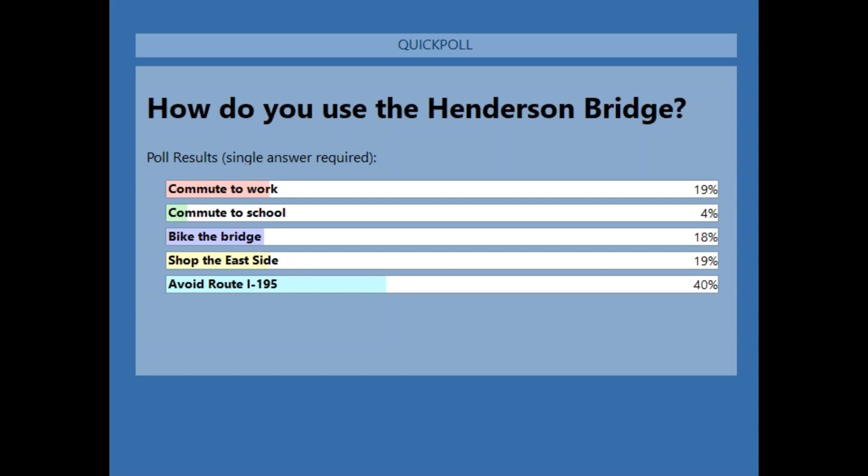And here are the poll results. In the lead by far, avoid Route I-195. Tied for second, actually three very close: shop the east side, which is good to see for the doctors, restaurants, and businesses on the east side; bike the bridge; and commute to work. Commute to school came in at 4%. Thank you for sharing in the poll.

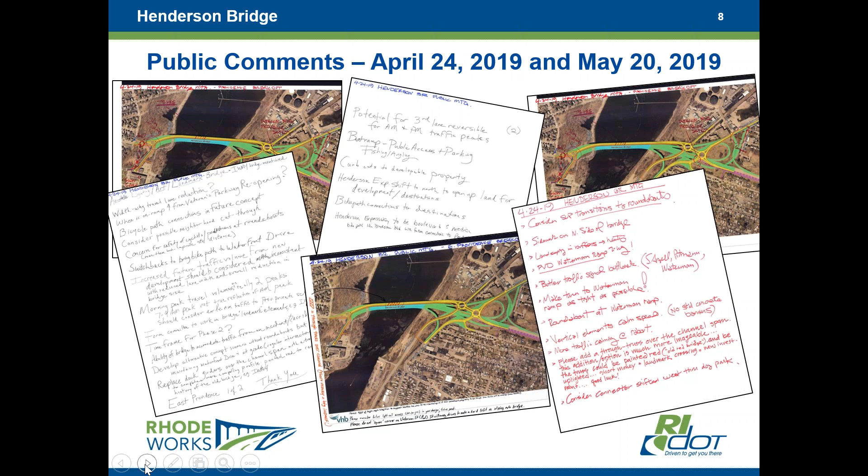They include a substantial protected bike path. Many residents were concerned for safety, as they were excited about the idea of a new bike path on the bridge. We heard about bridge overlooks and decorative lighting, great ideas to add to the look and feel of the bridge. We moved from the double roundabout option we showed in East Providence, after hearing from stakeholders and working with the city, to a new single roundabout in East Providence, which you'll see during this presentation.

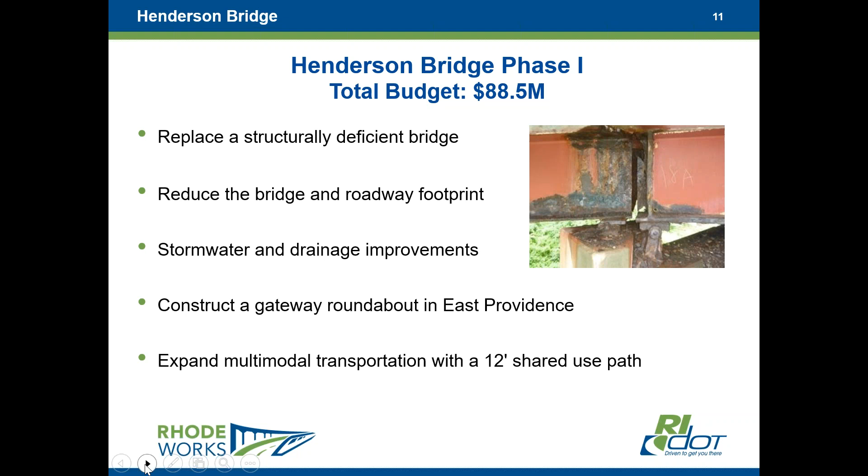During our public involvement, we heard it feels like a highway, speeds are excessive, and there's a safety issue on Waterman Street with the connection to the Henderson Bridge. That conflict is because Waterman Street sweeps onto the approach, and bicyclists are allowed to take that left as well. However, when vehicles continue through on Waterman Street towards Richmond Square, there's a potential conflict between the bicyclist turning left and the vehicle continuing straight. These are some of the issues we will address in our proposed improvements as we get further into this discussion tonight.

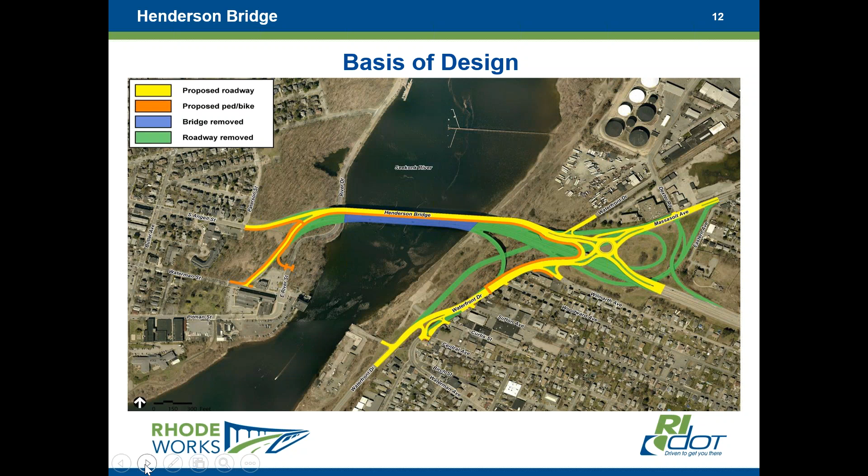So on the next slide, I'd like to continue with the proposed improvements for the Henderson Bridge. You'll note that the Henderson Bridge will be reduced in length and width. We provide 3 lanes, 2 lanes heading to Providence, 1 lane heading to East Providence, and incorporate a shared use path. We will post the bridge for 30 miles per hour.

We will also maintain that channel clearance, as I had mentioned, because it is a nice asset for potential waterfront development north of the bridge. We will, however, lower the East Providence approach, which allows us to reduce the length of the bridge and create an at-grade roadway through East Providence.

So in East Providence, by creating this at-grade roadway, our intention is to change the name of the Henderson Expressway and call it the Henderson Parkway. Again, the roadway would be posted for 30 miles per hour.

To facilitate the connections between these roadways in East Providence and the Henderson Bridge, we'll introduce a roundabout, an at-grade intersection. I would like to clarify that a roundabout is not a rotary. A roundabout is much smaller than a rotary. It operates at much lower speeds, and traffic entering the roundabout is under a yield condition, so vehicles within the roundabout have the right of way.

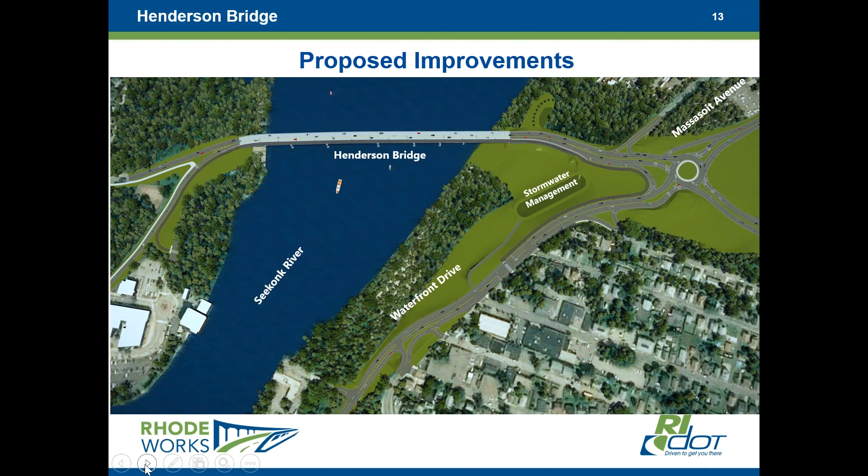Now I'd like to get into a little bit of the weeds of our design, starting with the traffic demands. Back in March of 2019, we performed traffic counts and reviewed historic data. We determined that approximately 21,000 vehicles use the bridge per day.

We've developed a VISSIM simulation, a simple term is a traffic model, and we calibrated that traffic model by witnessing existing conditions and understanding the backups that happen during the day. We use that model to support our design.

We've also worked with the municipal planning departments and accounted for future demands from anticipated projects, as well as the proposed improvements of the Washington Bridge project, since Gano Street will remain open, and the potential for a new off-ramp to Waterfront Drive from I-195. We took these traffic projections and forecasted them out 20 years.

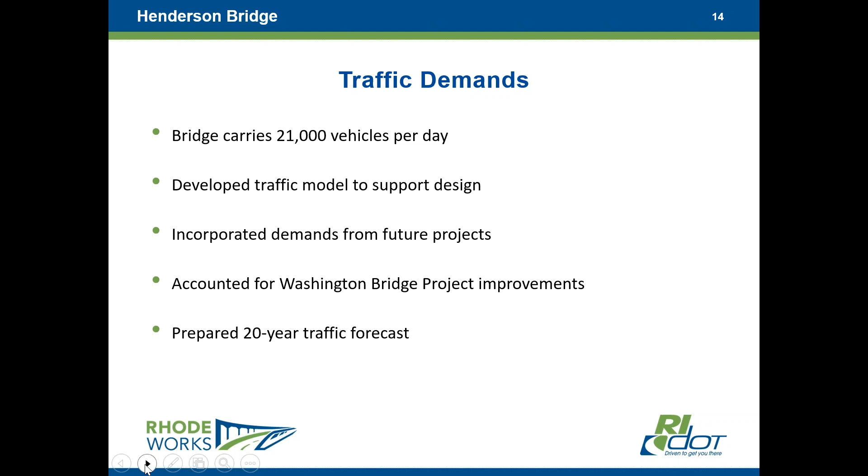On the next slide, we jump into that traffic evaluation to show you the reasoning behind the lane geometry we used on the Henderson Bridge.

We jump into peak hour, as Dave had mentioned. Peak hour is the most vehicles used in a certain hour. As we found, the morning peak happens towards Providence, during commuter hours between 7 and 9 a.m.

Under existing conditions, in that peak hour we have 1,245 cars per hour. In the 20-year forecast, we have 1,495 cars per hour. In reverse, the evening peak headed towards East Providence happens during commuting hours of 4 to 6. Under existing conditions, you had 1,085 cars per hour, and a 20-year forecast of 1,185 cars.

We have guidance that we use in developing our design. That guidance shows a local roadway network can handle approximately 1,200 cars per hour per lane. You'll see in the Providence direction we are just over that threshold in existing conditions with 1,245, and in the proposed condition, 1,495 exceeds that.

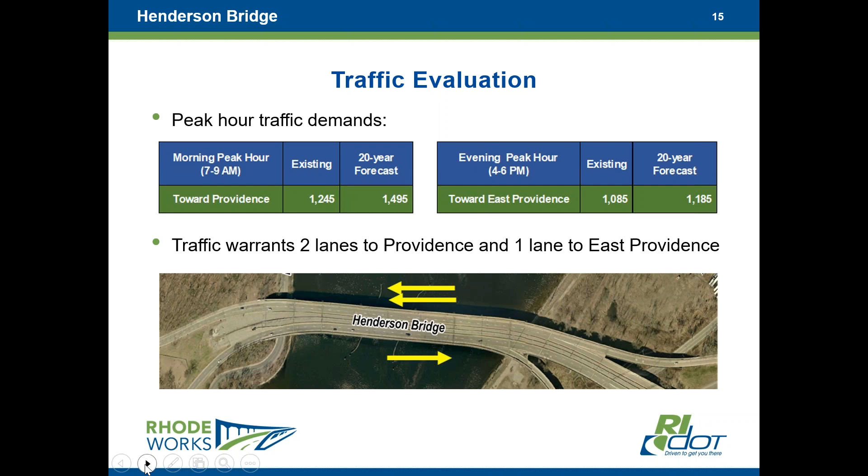Now that we've jumped into the weeds, I want to jump back out and give you the nice graphics that show an animation of our proposed improvements. Kathleen, if you could go to the next slide.

If you could start the animation, we are going to start on the new Waterfront Drive in East Providence, heading north towards the roundabout. I apologize for the choppiness.

As we're heading north, we just passed Waterman Ave coming into the new Waterfront Drive. You're looking at a mid-block crossing of the shared use path. We're coming up the new Waterfront Drive to the proposed roundabout. You will note the pavement markings show the yield condition that I mentioned.

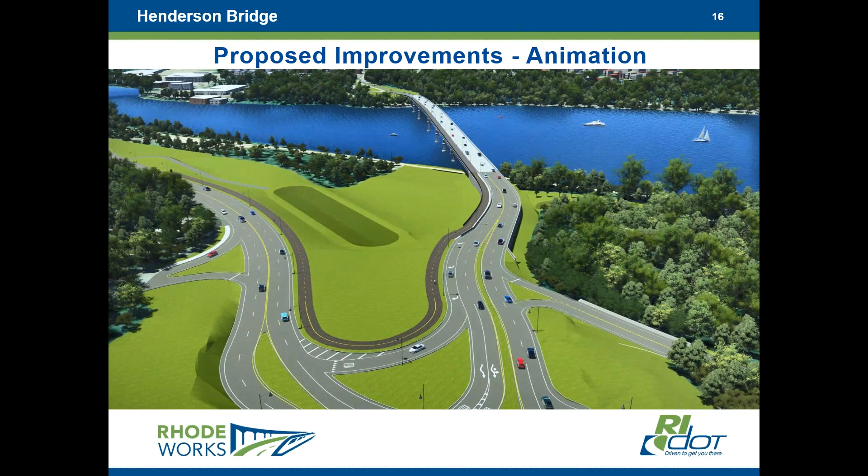We are now starting to head along the new Henderson Parkway. On the right-hand side of the screen, you see the Waterfront Drive with its right in, right out, again providing access to the potential developments north of the Henderson Bridge.

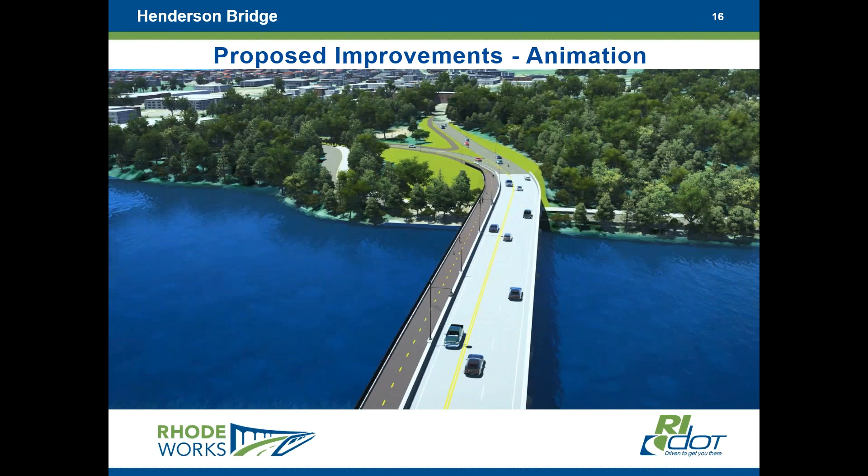As we fly over the Seekonk River heading towards Providence, you'll see 2 lanes heading towards Providence, 1 lane heading towards East Providence. A traffic calming measure you'll see not so much in the animation, but in proposed conditions, is a speed feedback sign on the East Providence side as you get off the bridge, presenting the speed of the vehicle coming across, and also a sign showing that the speed limit is 25 miles per hour.

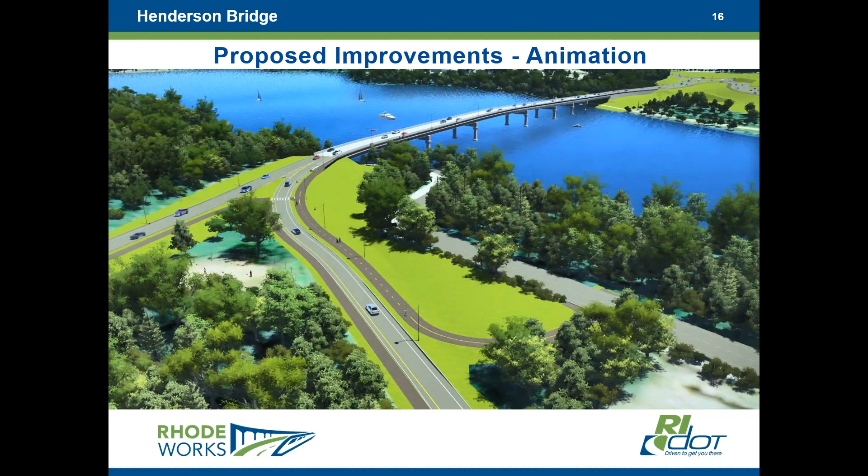One of the improvements we proposed on the Providence side is a sidewalk that connects South Angel Street to Waterman Street. It runs along the dog park.

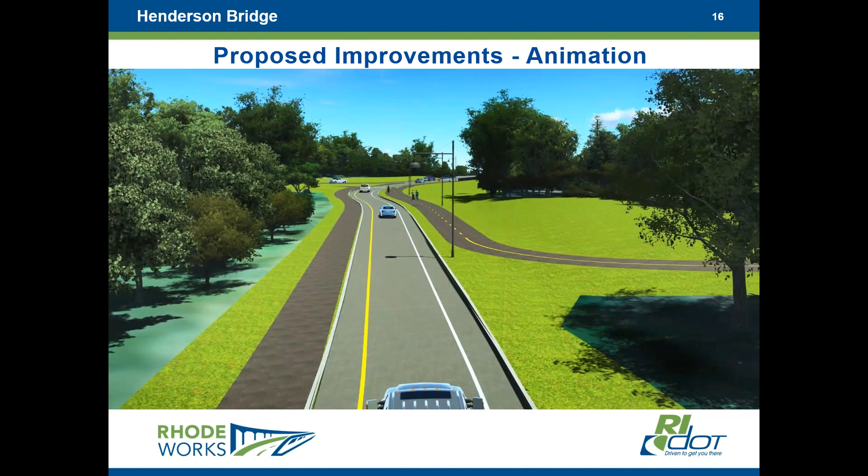Now we're turned around, heading towards East Providence, on the approach from Waterman Street towards the bridge. The proposed sidewalk I mentioned is on the left, the approach in front of you, and the shared use path on the right.

We continue up. Here's a pedestrian crossing from the proposed sidewalk to the shared use path, so the neighborhood on South Angel Street can be connected to not only the dog park, but the shared use path.

As we continue up over the bridge, you see two lanes heading towards Providence, one lane towards East Providence, and a 12-foot wide shared use path. We do incorporate decorative lighting, the taller ones over the roadway, the lower ones over the shared use path.

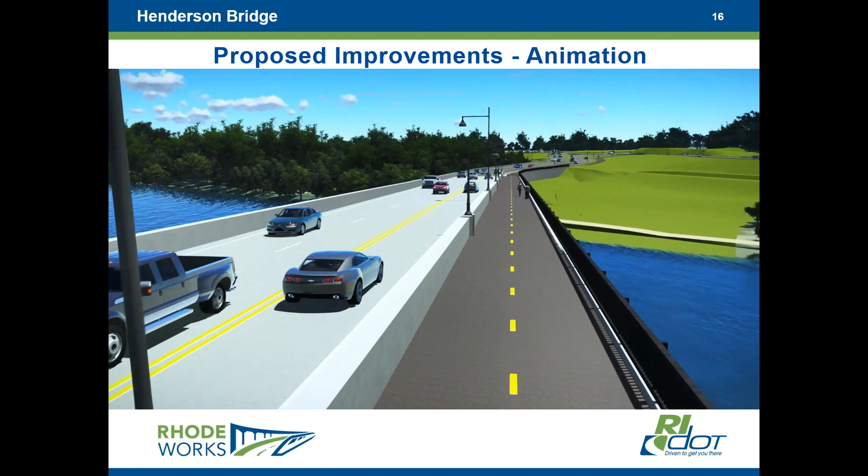As we continue on the bridge, it has been lowered, as I mentioned, and we come into an at-grade roadway, our new Henderson Parkway. I apologize for the glitch in the animation.

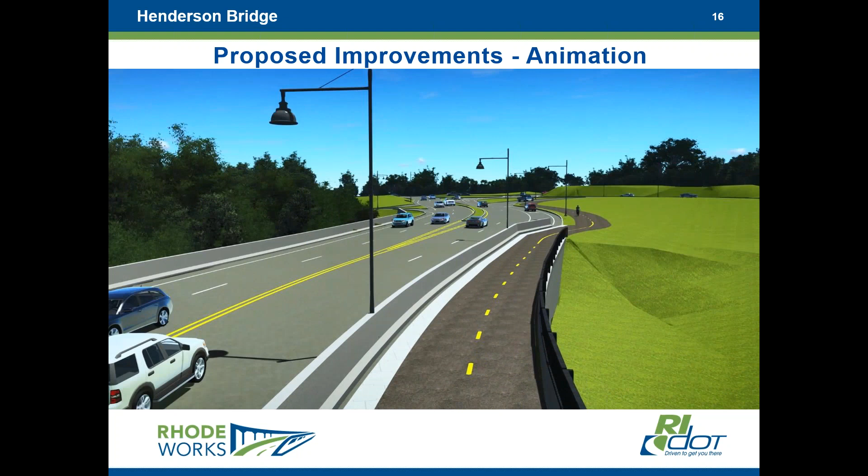As we continue into East Providence on the new Henderson Parkway, we open up into two lanes as we approach the roundabout, just a way to manage traffic in and around East Providence. We also provide a slip lane to the right, which will peel traffic out of the roundabout and allow them to head south on the new Waterfront Drive.

On the left-hand side of the screen there's also another slip lane, coming from Massasoit Avenue, again peeling some of the traffic from the roundabout and allowing them to head towards Providence and the Henderson Bridge.

This animation will be included on the Henderson Bridge project page and will also be posted on YouTube for your future consideration. As we finish up the animation, I'm going to jump into some still images of this animation.

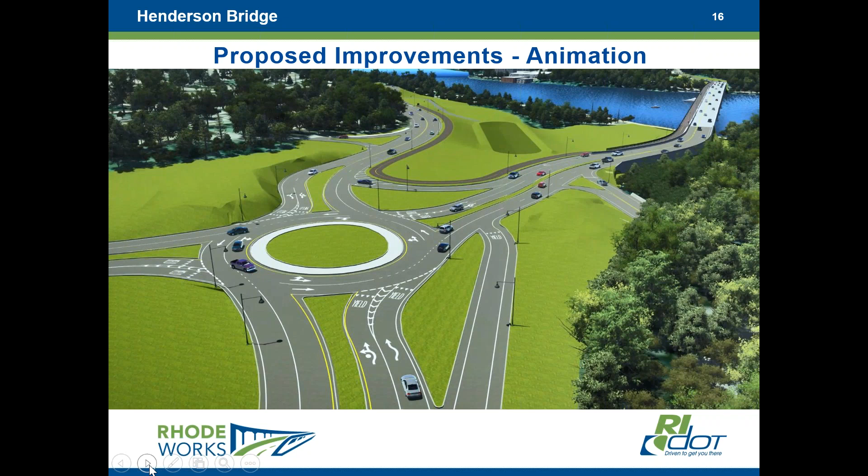Here's a still image on the Providence approach from Waterman Street, highlighting the dog park off to the left-hand side, the proposed sidewalk connecting South Angel Street to Waterman Street, the one-lane approach from Waterman Street to the Henderson Bridge, and a grass buffer between the roadway and the shared use path.

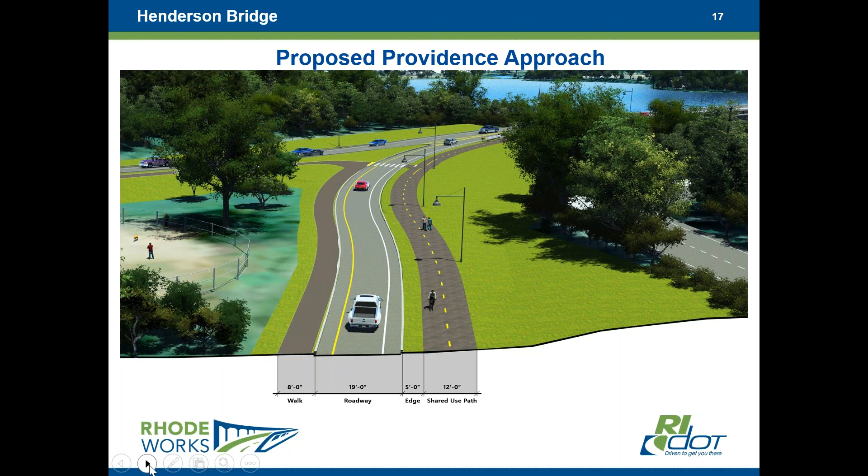On the next slide, just a view of the proposed bridge, again showing two lanes heading towards Providence, one lane towards East Providence, and a 12-foot wide shared use path. The lanes are 11 feet wide, a reduction from the 12 feet you see out there today.

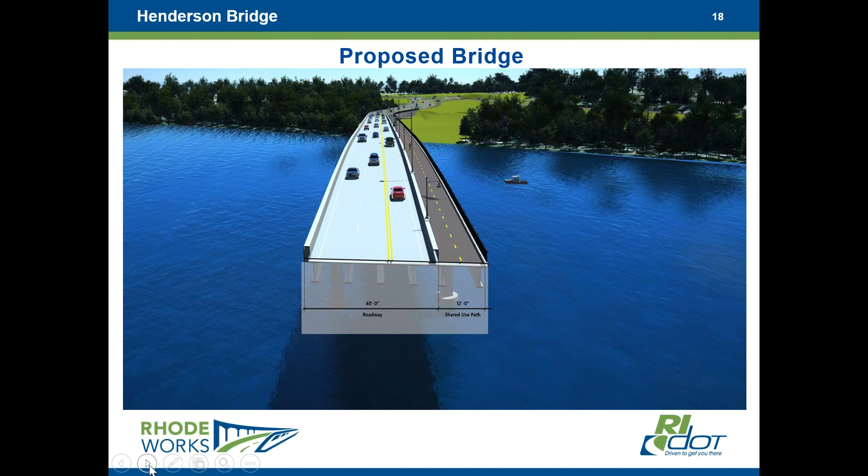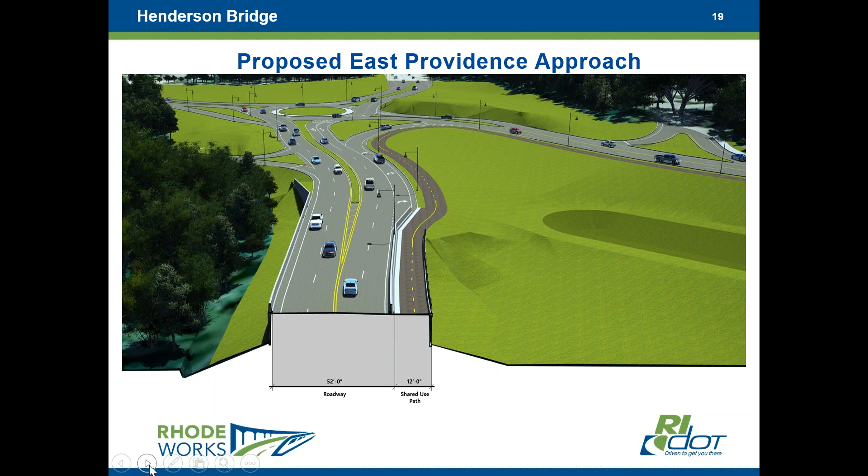Our next slide shows a view of the new Henderson Parkway, again a roadway with 11-foot travel lanes and a 12-foot wide shared use path. This also gives you a view of that slip lane I mentioned on the approach to the roundabout. Our last still image will be of the new Waterfront Drive.

Looking north, you see in the middle right Waterman Ave coming into Waterfront Drive and continuing up towards the roundabout. You see the mid-block crossing where the shared use path comes across the bridge, as Anthony had mentioned.

At the mid-block crossing, there'll be a special traffic signal introduced such that bicyclists and pedestrians will be able to push the button. Traffic will be stopped on Waterfront Drive, and bikes and pedestrians will be able to cross the road, making that connection from the neighborhood east of Massasoit Avenue today to the waterfront.

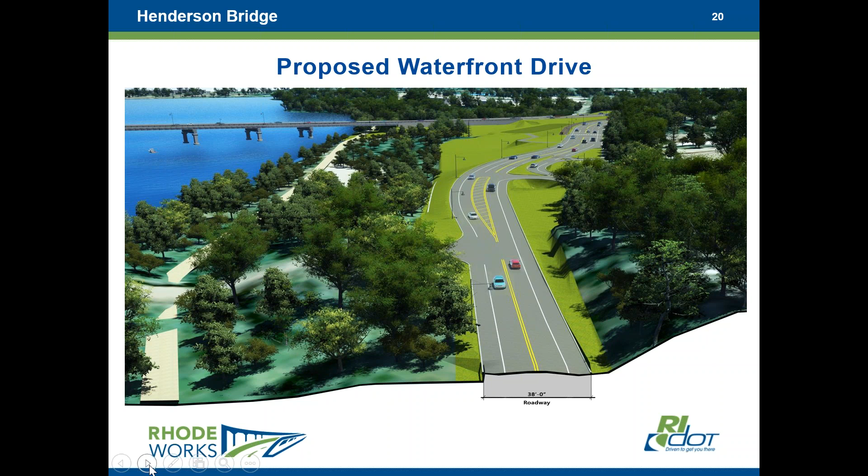On the next slide, I'd like to jump into the construction timeline we anticipate for this project. I'd like everyone to note that the construction phasing we've developed is meant to build it safely and efficiently. We've minimized the number of traffic phases and shifts throughout the project.

More importantly, the Henderson Bridge remains open during construction. We maintain vehicle and bicycle access. We've also coordinated with RIPTA, as I mentioned before, and will ensure service is maintained throughout the construction of the project.

The benefit of DOT today is that Anthony Pompey is the project manager for the Henderson Bridge and the Washington Bridge project, so the construction phasing will be coordinated throughout construction as we move these projects forward.

The timeline presented shows construction is anticipated to begin late summer, early fall of 2020. We will begin shifting traffic within the project limits to the southerly bridge in the winter of 2020. As we merge Waterfront Drive with Massasoit and create the at-grade roadway of the Henderson Parkway, we will need to close Waterfront Drive between Waterman Ave and Dexter Road. We will implement detours in East Providence to facilitate traffic, and we will also shift traffic to the new bridge in the spring of 2022. We will need to clean up and demolish the existing bridge and other elements, so the project will be complete by summer of 2024.

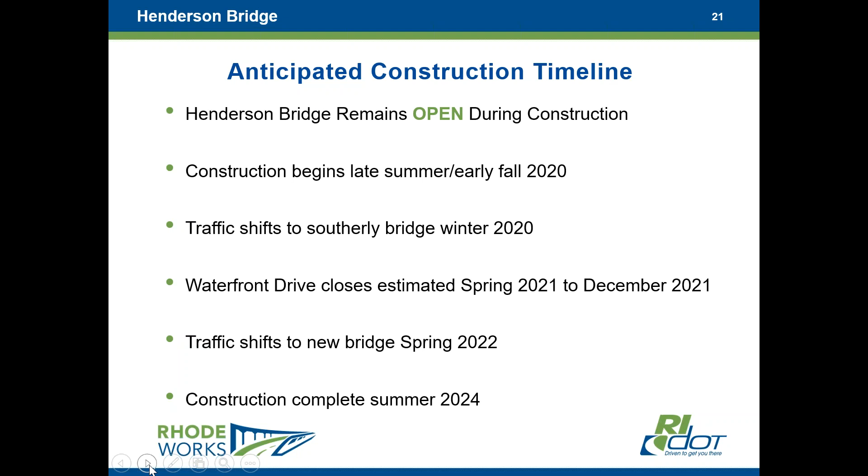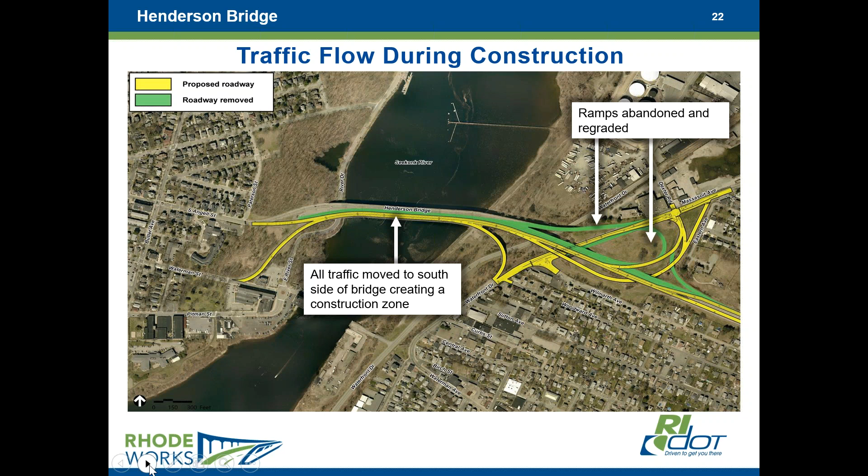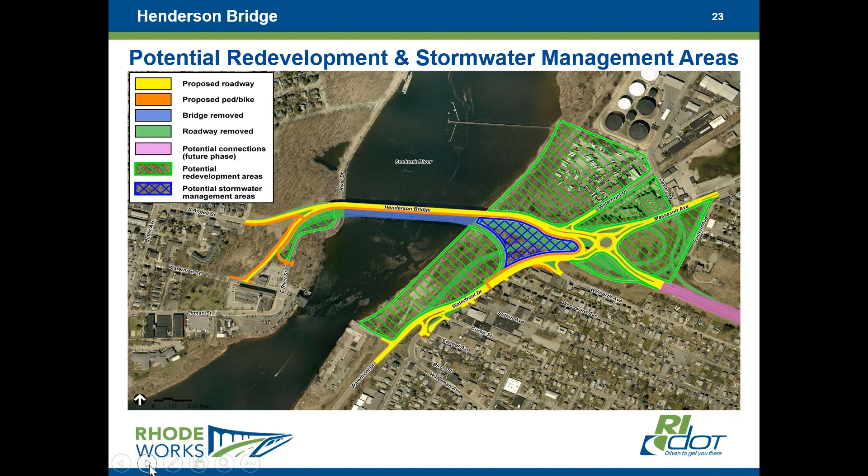Anthony? Great, thank you, Jamie.

All of the designs and details Jamie just reviewed have been fully designed and will be constructed as part of the construction project scheduled to start later this year. I would now like to share some initial concepts about the future phase 2 contract that we're currently anticipating to advertise for construction after the completion of phase 1. Our main goals for phase 2 would be the extension of the shared use path further into the cities of Providence and East Providence, additional traffic calming and safety improvements on both sides of the river, creating a bridge overlook and other public spaces that could be used by all users, and enhanced landscape and urban environment elements.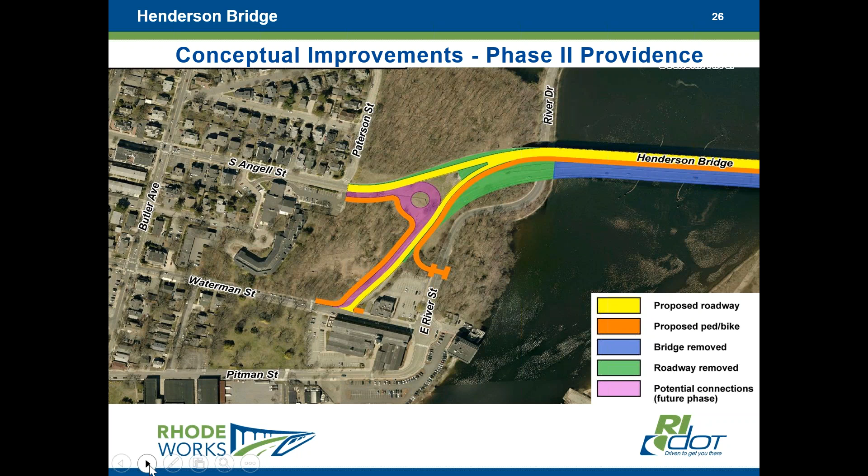Here we have the other side of the river, which shows a northerly extension of the shared use path up Massasoit Avenue. This phase would also include redevelopment of the remaining portion of the Henderson Expressway all the way to North Broadway, with reconstruction of the intersection at that end as well. A current concept would propose another roundabout in place of the existing bridge that carries North Broadway over the on-ramp to the Henderson Expressway.

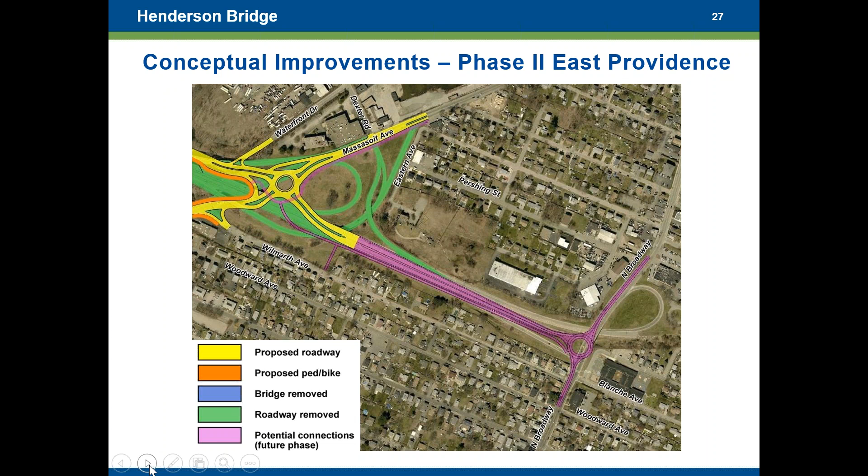Now we show some conceptual renderings to serve as inspiration and a starting point for some potential phase 2 improvements. Here's a conceptual image of a potential bridge overlook area. We were able to incorporate some design details into our phase 1 project that would allow this or something similar to be constructed with very minimal impact to the new structure.

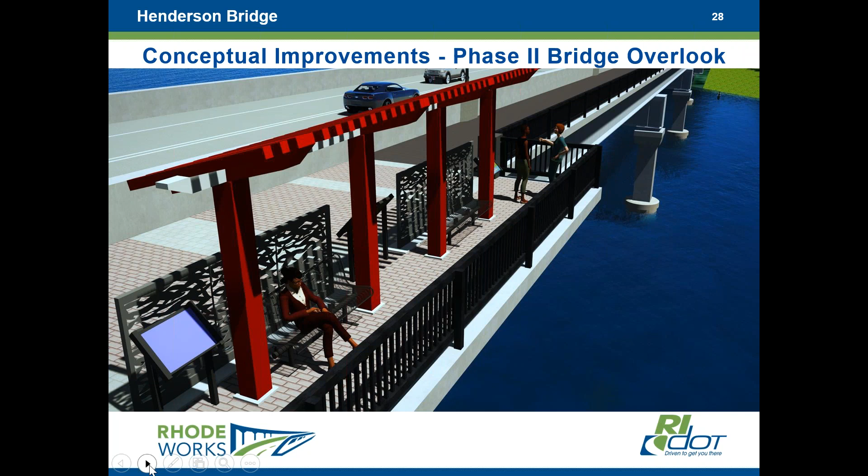On our next slide, we'll have a look at some potential landscaping and urban development opportunities as envisioned by one of our landscape architects. Improvements such as these could be incorporated throughout the corridor, providing a cohesive design for the area as a whole.

We'd appreciate any feedback you may wish to offer on any of these concepts, and would encourage you to reach out to municipality planning offices to discuss any specific ideas you may have before our design activities begin within the next year or two. When we do begin our design for this phase, we'll be working directly with each city to incorporate as many design features as possible. As we continue our STIP revisions this summer, we hope to be able to provide some defined budget and schedule information as well.

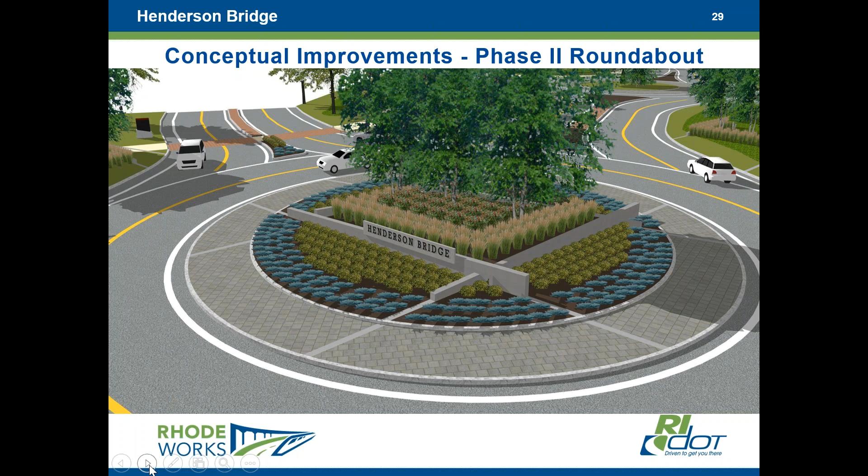And with that, I'll turn it back over to Dave for our second poll question.

Thank you, Anthony. Our second poll question is focused on phase 2, which will be our initiative starting next year. What component of phase 2 is of most interest to you? Please select one: roundabout installation and roadway realignments, extension of bicycle and pedestrian access to the shared use paths, creation of green space and landscaping features, or the decorative bridge features, similar to the overlook and uplighting that we have heard from our public involvement meetings.

Again, please take some time and select one. This will go into our review prior to design as we get past concept, working with the planning departments of both cities for our phase 2 project. I'll give everyone a few more seconds to choose an answer.

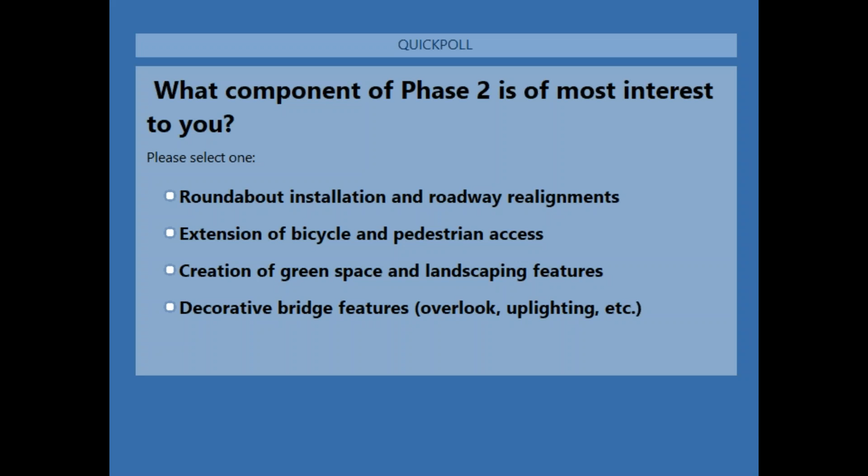Okay, let's see the results. What component of phase 2 is of most interest to you? Number 1, extension of bicycle and pedestrian access, followed closely by roundabout installation and roadway realignments, along with creation of green space and landscaping features. The decorative bridge features finish at 10%. Again, thank you for participating in both polls.

So now we'd like to have Anthony come back on to give you a preview of the upcoming Washington Bridge project, which again is so related to the Henderson Bridge project in many ways.

Thanks, Dave. Due to the proximity of these two major projects, we thought this would be an ideal time for a first introduction to our upcoming Washington Bridge project. You can see several key components of our proposed project listed here that I'll get into more detail on the next slide. We've designed this new project with a primary focus on maintaining existing traffic levels to the maximum extent possible throughout the construction duration, while also providing dramatic improvements under final conditions to the delays currently experienced during rush hour periods. This is a design-build project that is also currently advertised, with construction anticipated to begin in 2021.

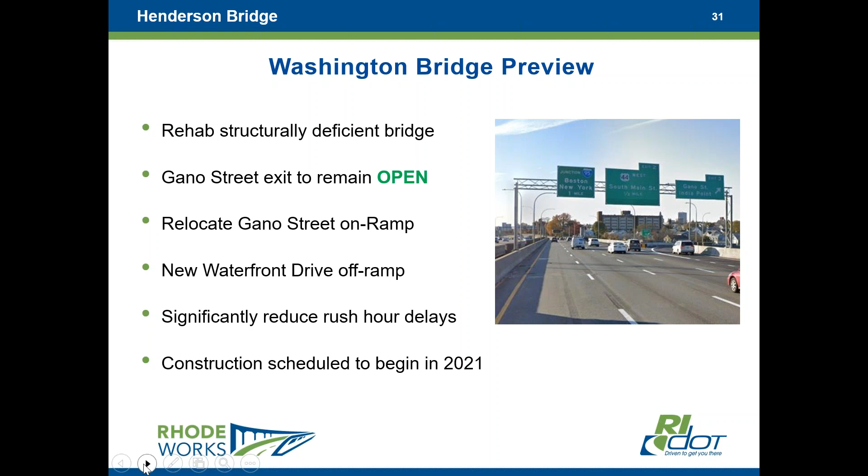This image is an overview of our proposed conceptual improvements. Project limits shown in yellow are from the Broadway underpass in East Providence to the South Main Street off-ramp in Providence. The orange segments shown represent some new proposed infrastructure components. Some key improvements include the elimination of an existing lane drop near the Broadway underpass, on the right side of the screen. By restriping this corridor, we can maintain 4 travel lanes throughout the East Providence section of the interstate, removing a significant existing bottleneck.

This newly extended 4th lane will then become an exit lane to a new exit to Waterfront Drive, providing direct access to the entire East Providence waterfront and the Henderson Bridge area. The remaining 3 lanes on the interstate will then join the 2 on-ramps from Taunton Avenue and the Veterans Parkway as they do today. However, by slightly widening the westerly 4 spans of the existing bridge between the Gano Street exit and Gano Street, on the order of only about 10 feet, will allow us to convert the existing right lane.

This will convert the existing right lane from an exit lane to Gano Street into an option lane that also allows vehicles to continue on 195. By eliminating a major weaving movement, this modification will drastically reduce existing delays on the interstate during commuting hours, while also keeping the Gano Street exit open to traffic.

As part of these modifications, we'll also need to relocate the existing Gano Street on-ramp to the other side of Gano Street. It will run directly alongside the existing exit ramp at the same elevation, with access at the same signalized intersection at Gano Street, which will be modified to allow a left turn for southbound traffic. This change will provide the necessary sight distances for vehicles entering the highway and provide a safe merge into highway traffic.

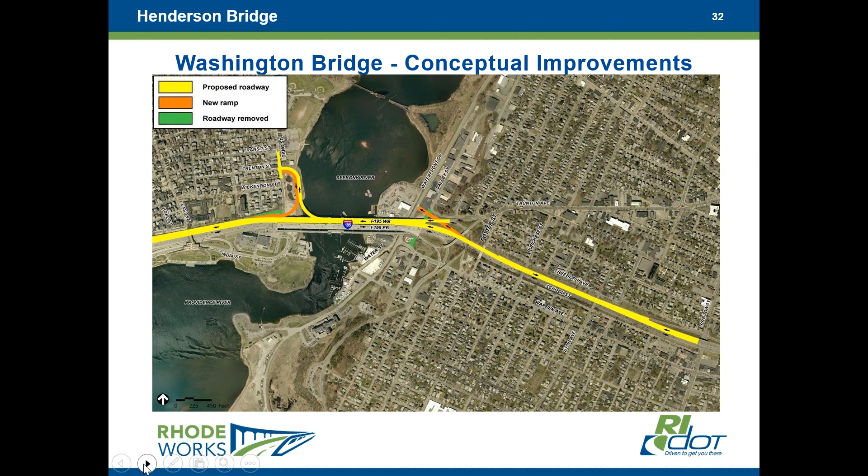As our presentation nears its end, I'd like to cycle back to something I mentioned at the beginning. Our project webpage for the Henderson Bridge is now live. The site contains a lot of summary information about the project, as well as the animation shown earlier, and a full copy of tonight's presentation. Once construction begins, this page will be updated regularly to keep everyone informed of the ongoing progress and any upcoming traffic restrictions.